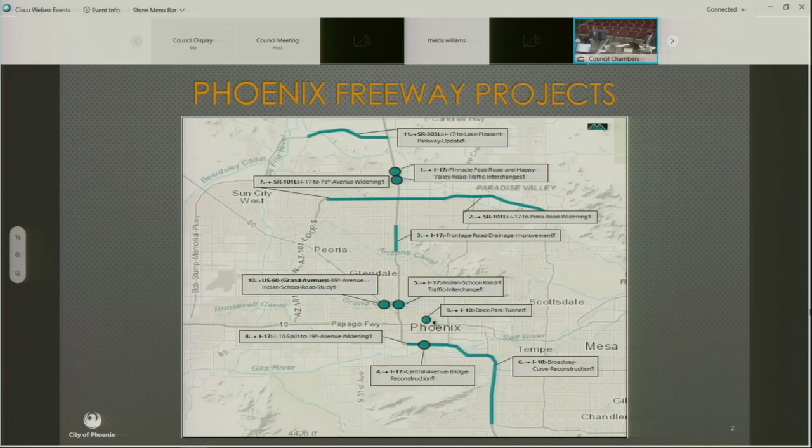The last one I wanted to point out briefly is number 9, in the center of your screen right above the word Phoenix. That's work taking place at the Hance Park tunnel repair. Anyone who's driven through the tunnel has perhaps had drips on their car, because there are 15 joints in the park. We've partnered with the City of Phoenix Parks Department as they were putting in the new playground, and we've put in a number of new joints to stop that leaking. We'll continue future joint repairs in partnership with the parks moving forward.

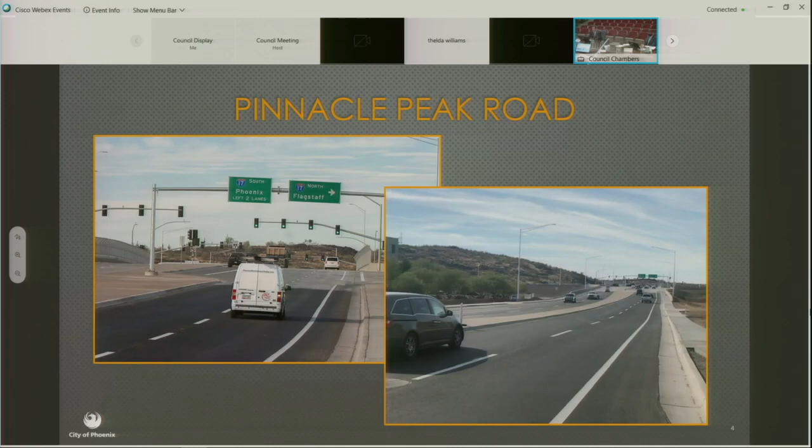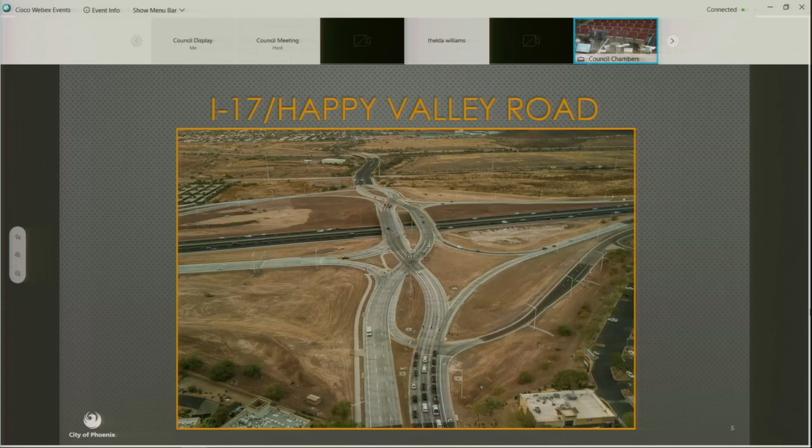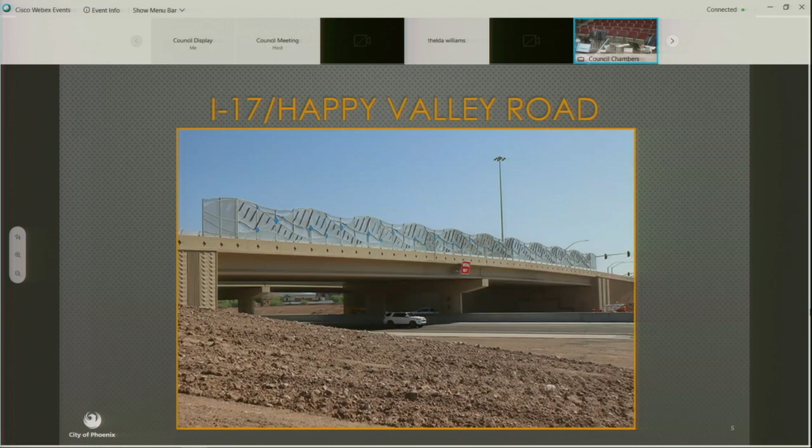The first project I want to talk about today, I'm excited to announce the new traffic interchanges at I-17, Pinnacle Peak, and Happy Valley Road are now open to traffic, which just happened this past month. At Pinnacle Peak Road, a new bridge was constructed with 2 lanes in each direction, with improved bicycle and pedestrian amenities. At Happy Valley Road, the roundabouts were removed and a new diverging diamond interchange was constructed, including 3 lanes in each direction, new bicycle and pedestrian access, and a new bridge art piece — the Office of Arts and Culture worked with artist Dan Mayer to design new artistic fencing along Happy Valley Road.

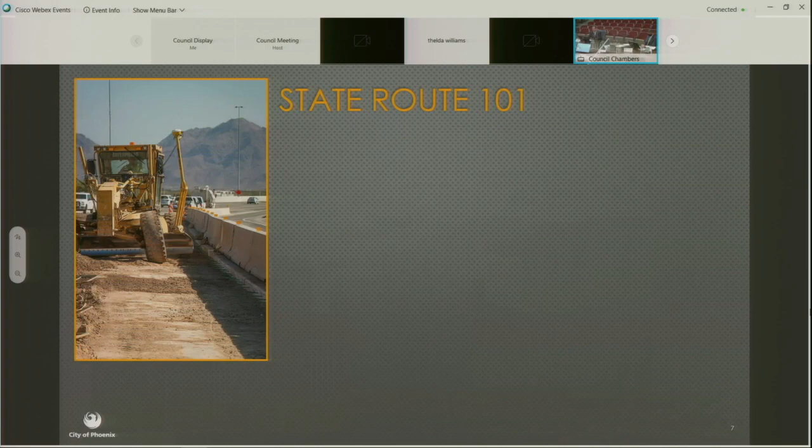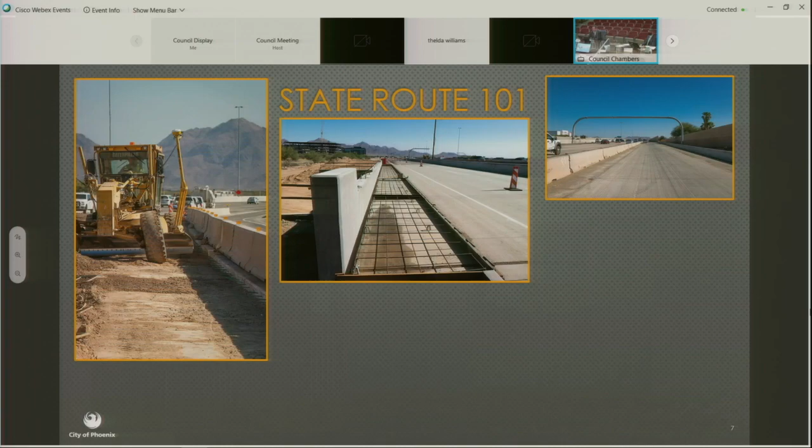The next project currently under construction is State Route 101. This widening project started in 2019 and includes adding 1 general purpose lane in each direction between I-17 and Pima Road. Additionally, an auxiliary lane in each direction is being constructed between 7th Street and Cave Creek Road, along with improvements to ramps and frontage road connections. It's been quite disruptive, but with lower traffic during the pandemic, work has proceeded quickly, and we're seeing completion of some sections, new sound walls along the corridor where warranted, and some new quiet pavement going in. This project is still on schedule for completion in mid-2021.

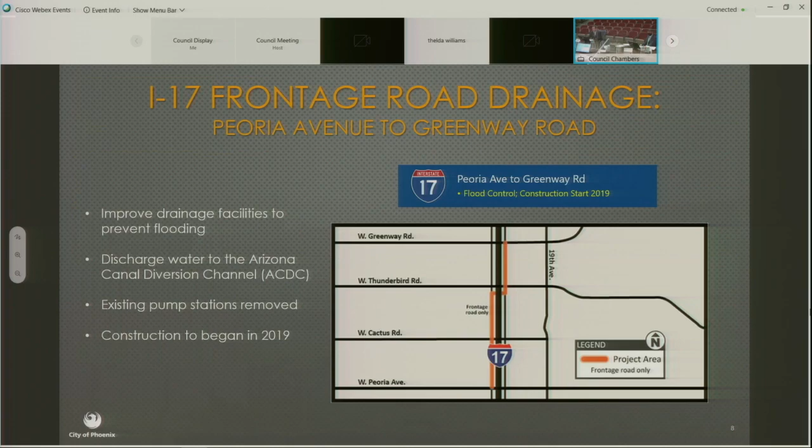The next project is one you received a presentation on at a policy briefing last year from ADOT — the new changes to drainage along I-17 between Peoria Avenue and Greenway Road. Construction started in January of 2019. Work at Peoria Avenue is almost complete, and now work is beginning at Cactus Road, so you might see closures along the frontage road there.

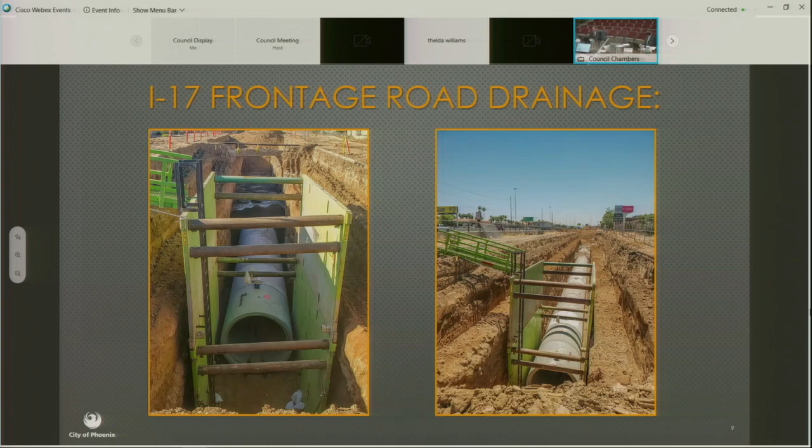This construction is replacing all of the old pump stations and putting in a new 90-inch pipe to drain water into the Arizona Canal diversion channel. The project is halfway complete, so we hope to see this done in the next year.

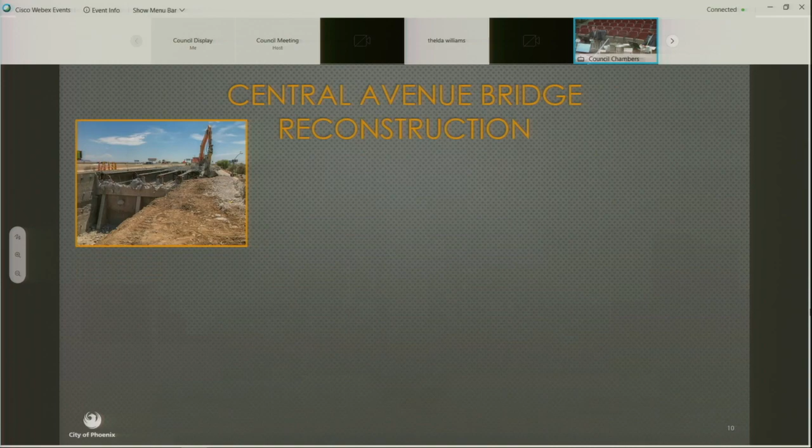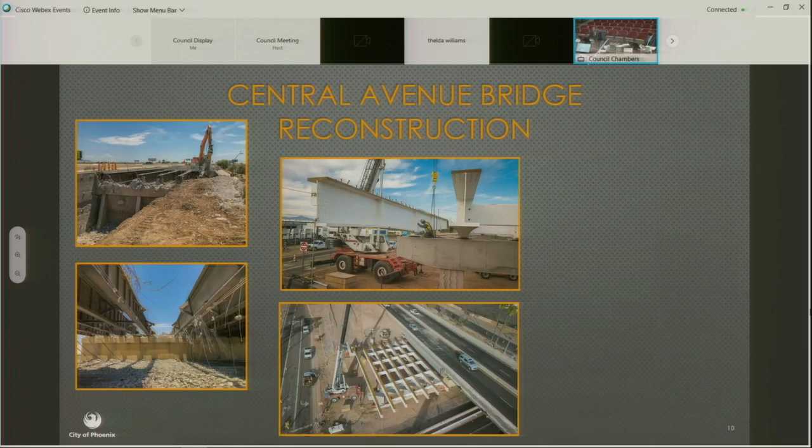Another project that's received a lot of attention is the construction of a new bridge at I-17 and Central Avenue. This entire section of I-17, going east to west, will be widened in future years, and that's the project I mentioned earlier that's under study. The bridge, though, is the first item to get replaced. The bridge at Central Avenue was over 50 years old. It needs to be changed out to accommodate the new light rail system going underneath it, and it also needs to be widened for the future widening of the corridor.

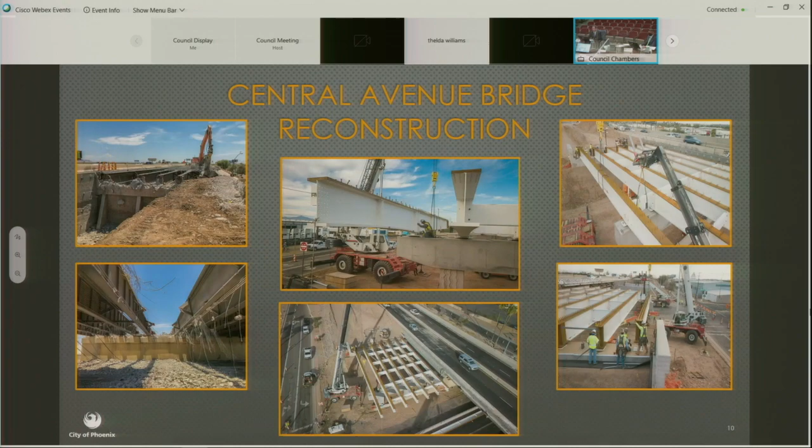The south side has been taken down, so as you look at the pictures on your screen from left to right, it shows the south side of the bridge being torn down and the new, widened bridge going up. The south side will open in a couple months, and then the north side will receive the same treatment of being torn down and rebuilt. Completion of this project is expected in fall of 2021. I should note again that ADOT and the city are working closely with Valley Metro Rail to coordinate any closures on this project as the new South Central Light Rail system is going in as well.

The next project to provide an update on is the Indian School Road and I-17 traffic interchange. In February of 2020, the City Council Policy Committee received an update from ADOT on this project. Since that time, ADOT has completed the environmental study and design concept report for this project to move traffic east to west in a better fashion. ADOT is at 30% design, but they've put a temporary hold on this project at this time. The City of Phoenix, working with the Maricopa Association of Governments, is conducting a bottleneck study along Indian School Road, looking at it as a corridor and not just as this traffic interchange.

We want to make sure we're inclusive of making sure the entire facility works and that we don't have bottlenecks when traffic comes up and over the freeway and gets to 27th Avenue. As you know, at 27th Avenue we have a number of pedestrians, cyclists, transit users, and neighborhood users. So we want to make sure, working with the Street Transportation Department, that we're looking at all elements in this area. As that additional look takes place, we've requested that ADOT come back and provide additional community meetings to talk about the project. But because we're doing a deeper dive, construction isn't expected to start until 2022.

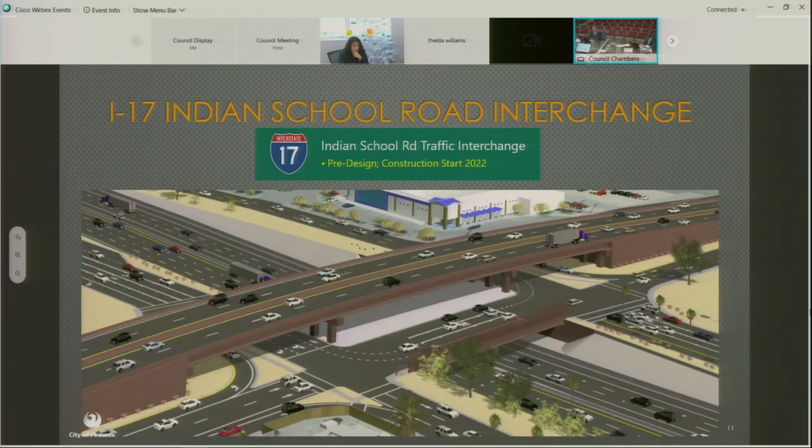Could we also, in the bottleneck study, look at—because it's an interchange and it's moving traffic—can we also look at the possibility of a BRT moving through there? Madam Chair, Councilwoman Pastor, I will work with Mario and the transit team to look at that option and bring it back to you. Thank you. Good idea.

Madam Chair, the next item in front of you is the Broadway curve reconstruction, a big project. It'll be the largest freeway reconstruction project in the region, if not the state, and it goes from the I-10, I-17 split all the way south past Ray Road. As you may recall from previous presentations, traffic volumes within this 11-mile corridor exceed 250,000 vehicles per day and include those vital connections to I-17, State Route 143 into the airport, US 60, and Loop 202.

Just as a refresher of the map in front of you, proposed improvements include 2 HOV lanes, 6 general purpose lanes, and auxiliary lanes in the gold section; 1 HOV lane, 4 general purpose lanes, and auxiliary lanes in the purple section; and new collector-distributor roads in the orange section. Additionally, there will be improved connections to US 60 and State Route 143. ADOT is in final negotiations with the preferred proposer, a consortium of companies—Pulice, FNF, and Flatiron. A contract is expected to be executed later this month.

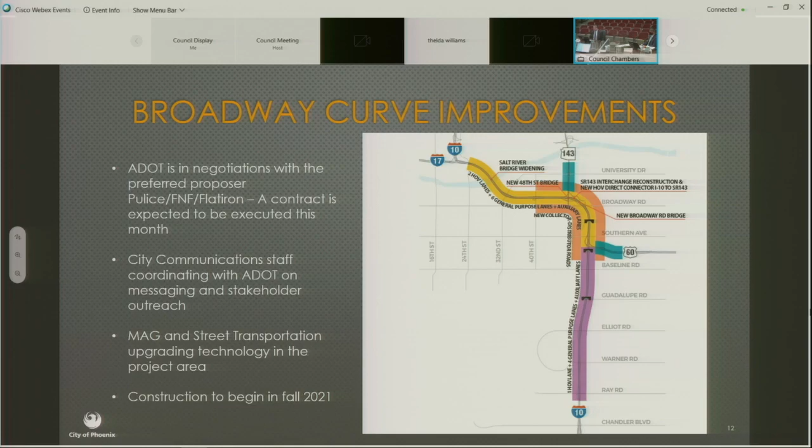Additionally, we wanted to let you know that city communications staff has been coordinating with ADOT on the messaging and stakeholder outreach, so that when this project starts we're able to reach out to all of the communities that will be impacted, from commuters, airport users, and neighbors, to make sure that traffic is flowing smooth and that there are ways to address it.

With that in mind, the Maricopa Association of Governments and the Street Transportation Department are working together. MAG is looking to provide additional funding to the city of Phoenix to make improvements to some of our arterials off this freeway network. There will be improvements to the signals, to the preemption devices, to fiber along there, so that when construction is underway we can monitor where traffic is going, and if we need to change some of the timing, that would be available to us.

Construction on this project is still scheduled to begin in the fall of 2021, so it is right around the corner.

A new project to bring before you—I think we haven't talked about this before, though it might have been in your monthly reports—there's a new study taking place through the Maricopa Association of Governments and ADOT, looking at the interchange of US 60, which is Grand Avenue, 35th Avenue, and Indian School Road. This design concept report proposes improvements that need to be made to this corridor along the arterial street networks, any sort of multimodal connectivity, and looking at how they all intersect with the BNSF railway.

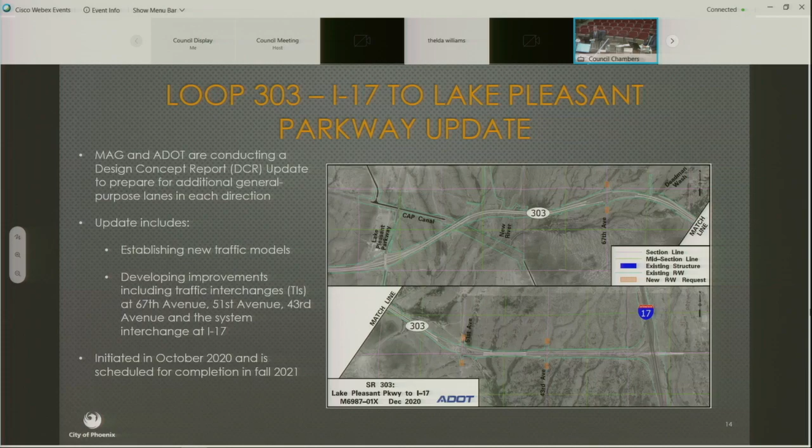With that, Madam Chair and members of the subcommittee, I'm available for any questions on any of the projects we brought forward. Anyone have questions?

Mayor, I just wanted to say this was a very good presentation. Yeah, go ahead, I wanted to say the same thing. I really appreciate the update. There's a lot going on with our freeway system, and as I always say, I'm really excited to see those drainage problems going away along I-17. So thank you. Yes, very good presentation, thank you, Tom. Thank you.

We will now go to the next item, 13. Pedestrian and bicycle safety.

Madam Chair, item 13, Kini Knudson, Street Transportation Director, and Assistant Street Transportation Director Briiana Velez, are here to discuss the pedestrian and bicycle safety programs, and I'll turn it over to Kini for the presentation.

Thank you, Mario. Madam Chair, members of the subcommittee, we're happy to be here this morning to present to you and talk a little bit about our bicycle and our pedestrian and bike safety programs.

This item was originally scheduled to come last month, but we wanted to have time dedicated to this issue. At the request of the subcommittee back in November, there was a request to provide additional information about our pedestrian safety improvements and our plans for that, and how we were coordinating those across pedestrian safety and bicycle safety efforts. This presentation is meant to provide that information.

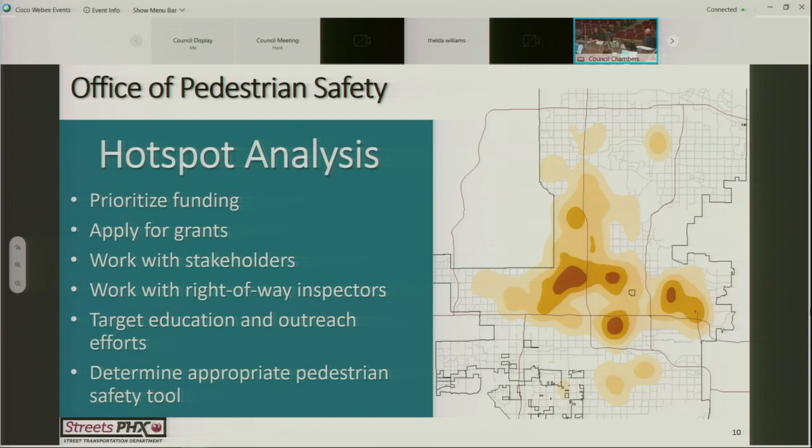As I just mentioned about using the data to apply for available grant funding, we are very excited to announce that the U.S. Department of Transportation awarded Phoenix nearly $17.5 million through the Better Utilizing Investments to Leverage Development, also known as BUILD grant. The grant will be used to make a series of safety improvements on the busy 35th Avenue corridor. The project consists of improvements that advance safety, mobility, and economic development in the project area.

This 3-mile portion of 35th Avenue between I-10 and Camelback Road is a pedestrian safety hotspot, where a higher number of pedestrian-related collisions and injuries have occurred in recent years. This corridor has diverse land uses and includes multifamily residential, commercial, and industrial developments, along with multiple K-12 schools, 2 community parks, and the campus of Grand Canyon University. The 35th Avenue corridor is one of the highest ridership areas for bus routes in Phoenix, with an average of 5,200 daily riders.

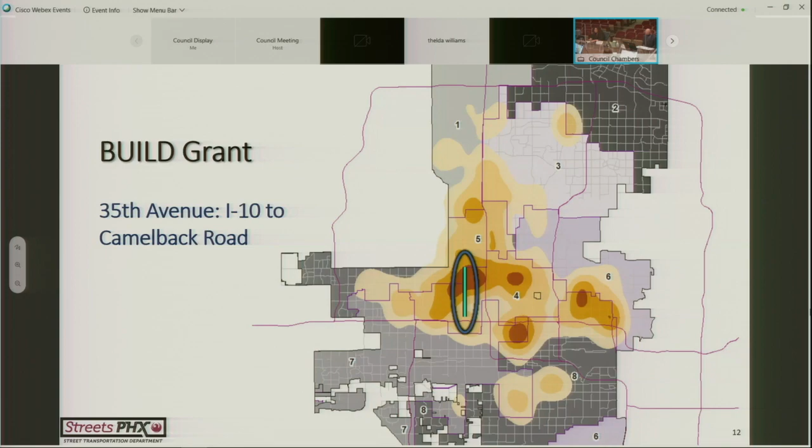Improvements planned for this project include installing 3 new HAWKs at mid-block crossings, installing LED street lighting along the west side of 35th Avenue, completing double-sided lighting throughout the corridor, and improving safety for drivers and pedestrians, installing raised medians at various locations to provide greater vehicle separation and a safe refuge for pedestrians, rebuilding 9 signalized intersections to modern standards that allow for support of new traffic technologies and safer operations, milling and overlaying the pavement to provide a smooth driving surface, and installation of broadband fiber optic cable to allow for the future integration of innovative technologies.

While most of the improvements I will be discussing in the upcoming slides are spot improvements, some locations such as this will need to be addressed as a larger capital improvement project to make safety improvements along an entire corridor.

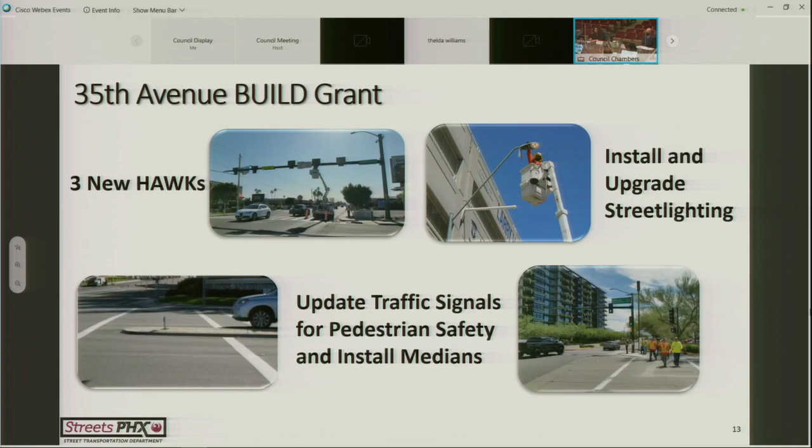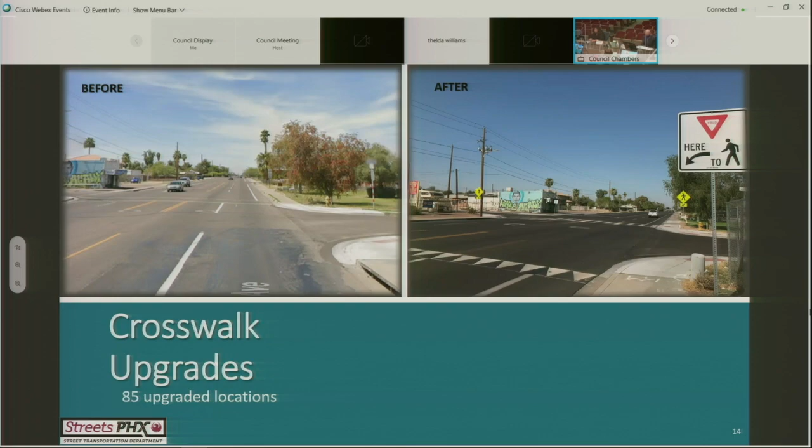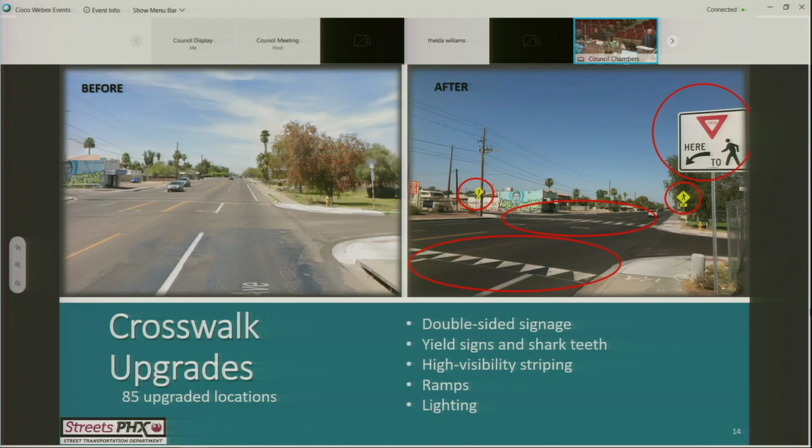Some of the spot improvements that were made in fiscal year 20 using the Office of Pedestrian Safety funding were crosswalk upgrades. To improve driver visibility of existing crosswalks on arterial streets, many crosswalks were upgraded to high visibility crosswalks, which include ladder style crosswalks, yield line markings, and additional signs. Some locations included additional streetlights and ADA ramp upgrades.

85 crosswalk locations on arterial streets citywide were upgraded to high visibility crosswalks. So every non-signalized mid-block crosswalk on an arterial street within City of Phoenix is now a high visibility crosswalk. We believe we've captured all of them, but if we identify any that were missed on arterial streets, then a work order will be immediately generated to upgrade the crossing.

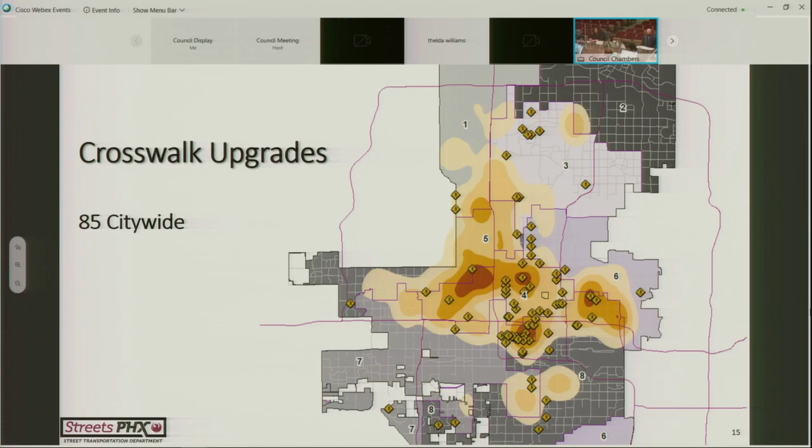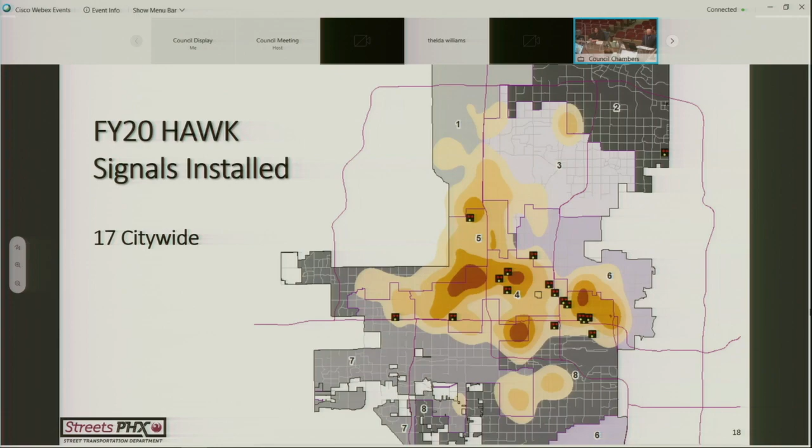To create a more seamless design and construction process for hawk signal projects installed with pedestrian safety funding, new hawk signals will be designed in one fiscal year and constructed the following fiscal year. In fiscal year 20, we were able to complete one new signal at 57th Drive and McDowell Road, adjacent to an elementary school. We are also completing designs on 8 new hawks and 1 new signal that will be installed this fiscal year. We have also dedicated funding this fiscal year for design of 6 new hawks at locations to be determined.

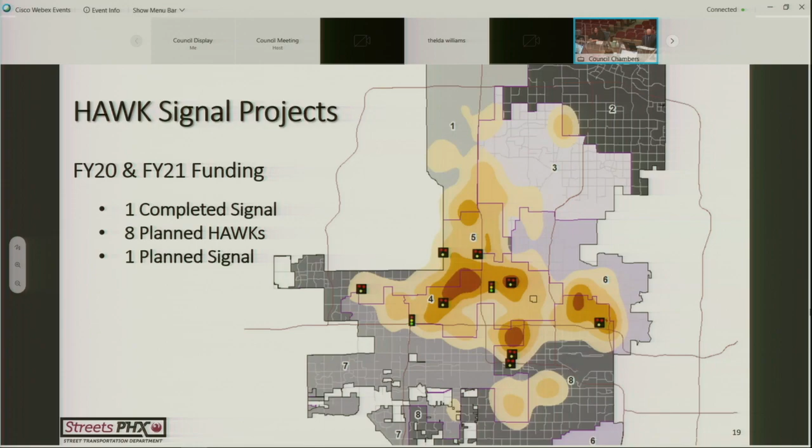As mentioned early on in the presentation, many pedestrian collisions occur in the dark hours, so having double-sided lighting on our arterial streets is important. You will find single-sided lighting on some arterial streets in the older parts of the city, and that is because at one point the standard on arterials was to have lighting on only one side of the street. The current standard, which has been in place for several decades, requires lighting on both sides of the streets for arterials. 2 areas were identified that had single-sided lighting and a high number of serious fatal pedestrian collisions during dark hours.

In fiscal year 20, 27th Avenue from Bethany Home Road to Maryland Avenue was designed and construction is planned this fiscal year. Thomas Road, 32nd Street to 36th Street is currently being designed and is planned for construction next fiscal year.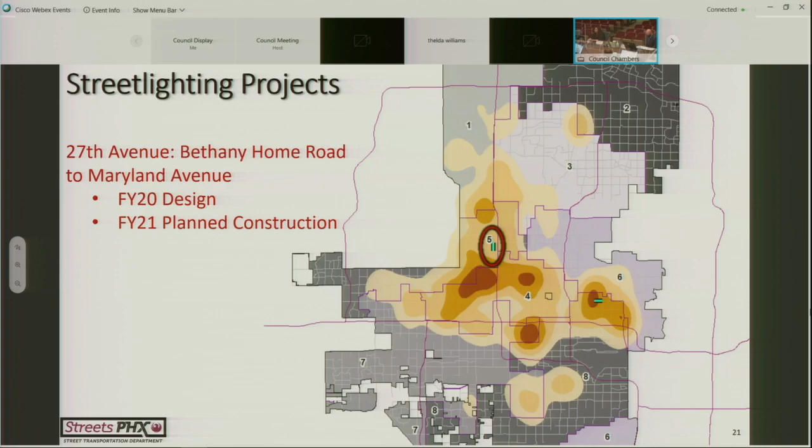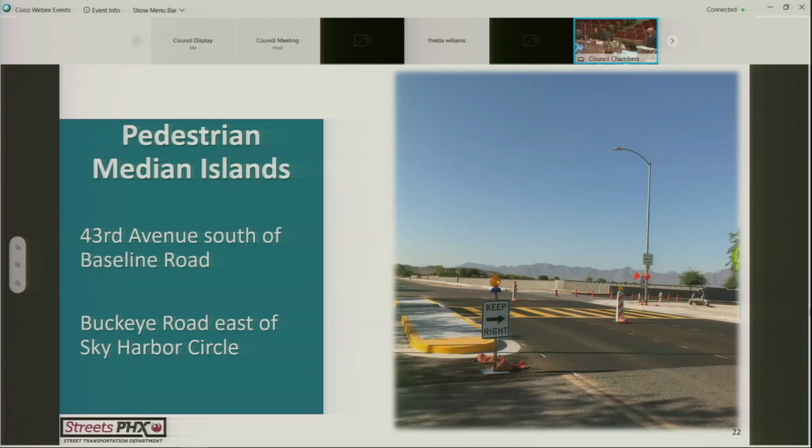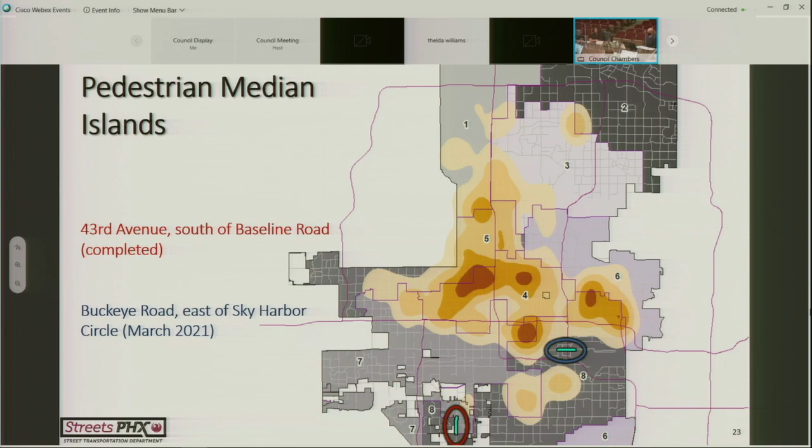Another safety enhancement are pedestrian median islands, which provide an area of refuge for pedestrians. Fiscal year 20 funding was used to design two median islands, one at 43rd Avenue south of Baseline Road and one at Buckeye Road east of Sky Harbor. The 43rd Avenue and Baseline pedestrian median island, which is adjacent to an elementary school, has been completed.

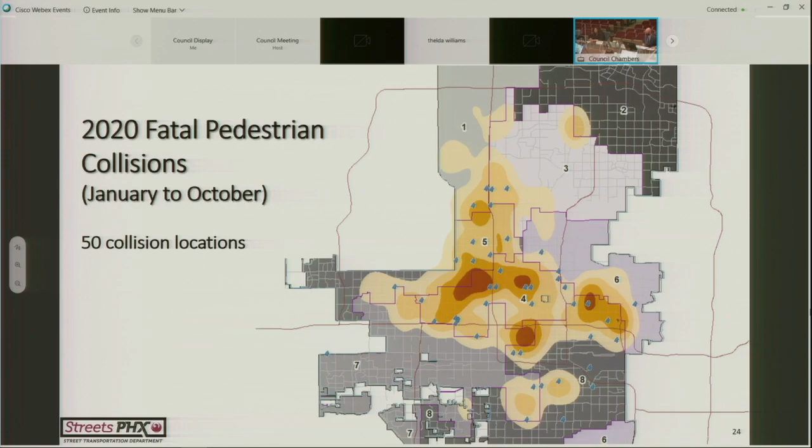In looking at pedestrian fatalities for the first 10 months of 2020, there have been 50 fatal pedestrian collision locations. Shown on the heat map are the 50 locations in blue, and you will see that almost every council district has been impacted, with the majority occurring in the central core of Phoenix and within hotspot areas.

This hotspot map includes both the 50 pedestrian fatality collision locations and the fiscal year 20 HAWK locations that were installed. The fiscal year 20 HAWKs were installed in hotspot areas throughout the city, with many installed near or at locations where a 2020 pedestrian fatality occurred.

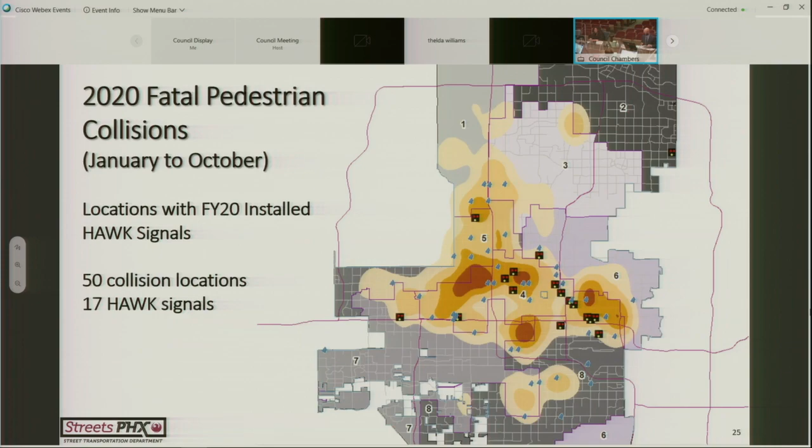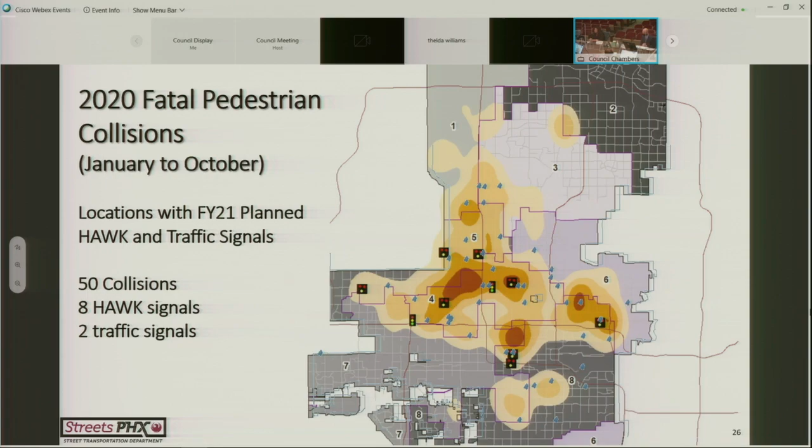Similarly, the hotspot map includes both the 50 pedestrian fatality collision locations and the planned fiscal year 21 HAWK and signal locations. The fiscal year 21 HAWKs and signals will be installed in hotspot areas throughout the city, with many installations near or at locations where a 2020 pedestrian fatality occurred.

Pedestrian safety is definitely a priority for the city, but when we look at roadway safety, all users of the roadway need to be considered, including bicyclists. When it comes to bicycle safety improvements, the Accelerated Pavement Maintenance Program is our greatest opportunity to make striping improvements.

Prior to the planned pavement maintenance on a particular street, staff will evaluate the existing striping configuration to determine if lanes can be narrowed to add in bike lanes, add in buffers to existing bike lanes, or narrow lanes to add an edge stripe. If lane removal is needed to add bike lanes or buffers, or bike protection is considered, then a public engagement process is required. Then the final striping design is completed.

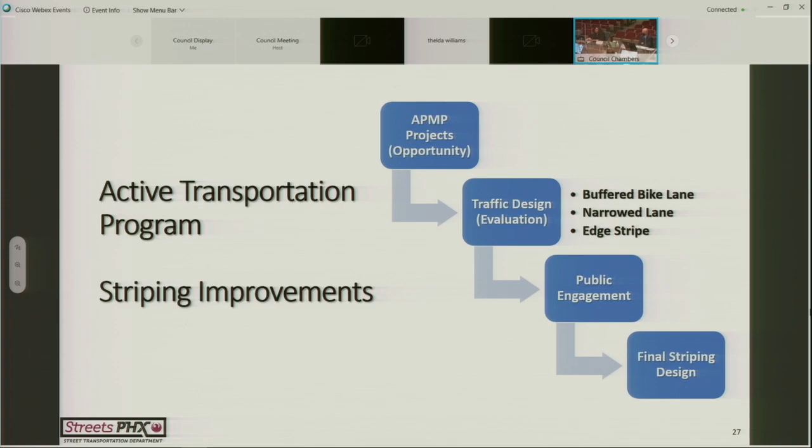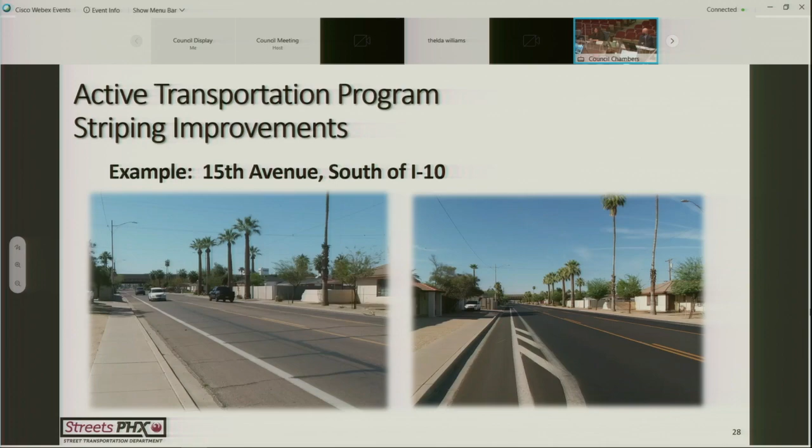In fiscal year 20, over 40 miles of new bike lanes were completed throughout the city, and buffers were added to almost 29 miles of existing bike lanes. In the first two months of fiscal year 21, close to 8 miles of new bike lanes have been completed, and buffers were added to 4 miles of existing bike lanes.

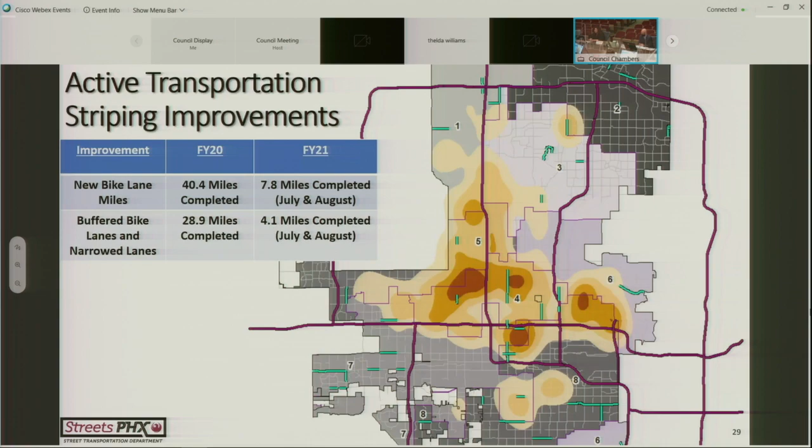Similar to what has been done in other cities to support social distancing and pedestrian bicycle safety during the COVID-19 pandemic, Street Transportation is launching a pilot program called Shared Streets for Social Distancing. Shared Streets is intended to support outdoor exercise for people of all ages and abilities and promote social distancing on low-speed neighborhood streets. 8 to 10 streets for local traffic-only restrictions will be selected through the application process for the pilot program.

It is a voluntary program, and residents nominate their street. The program will encourage local residents to get out and walk, run, bicycle, and scoot on their local street, while limiting it to local traffic only and encouraging drivers to drive slowly and cautiously.

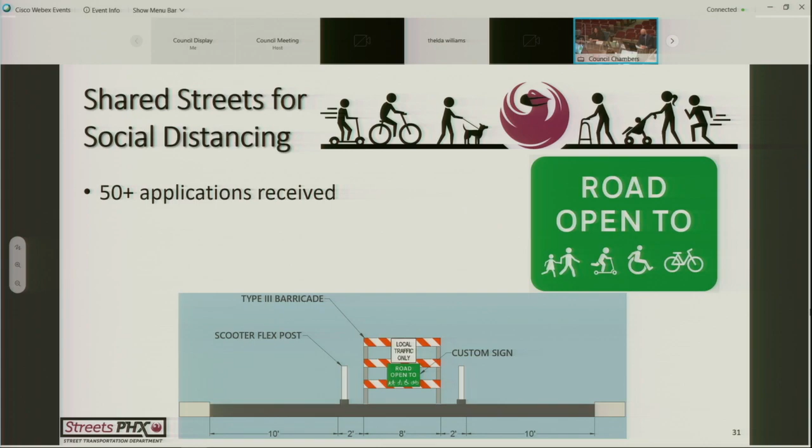The program is only available for local or minor collector streets that are at least a minimum of a half a mile. The application process opened in early December, and we have received more than 50 applications. They are currently under review with a focus on prioritizing locations based on criteria such as high population density areas with a greater need for recreational space, areas more than a half a mile from a park, trails, or open space, and locations with a higher percentage of households without cars.

Here's a picture of the local traffic-only barricade that will be set up at the selected locations during the pilot program. The pilot program and installation will begin in February 2021, and the program will run through May of 2021.

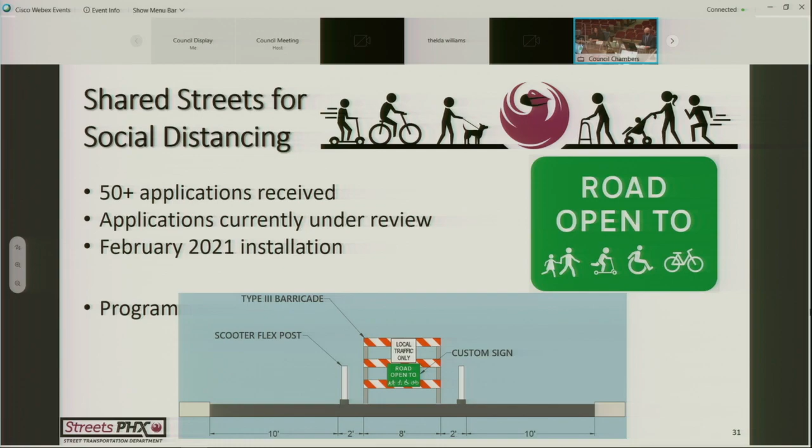And that concludes our formal presentation, and Keenan and I would be happy to answer any questions.

Chairwoman. Yes, go ahead. Thank you so much for that, Brianna and Kini. That was a great presentation.

I just have a few questions on this. I know you said in your presentation that there's going to be more HAWK lights installed, is that true? To be determined, correct. So with this year's fiscal year 21, we are looking at identifying 6 additional locations that we will design this year, and then construction will take place in fiscal year 22.

And how are you making those decisions on where they're going? Madam Chair, Vice Mayor Guardado, we are utilizing the hotspot map and the data that we receive on the VRUs to make a determination on the highest priority areas.

Okay, because I would like to be able to see that. Just from the heat map, it was great to see it between Councilwoman Pastor and I. I think we have a lot of those issues. So it would be good if you guys could, before those decisions get made, take us into consideration as you're making them.

This procedure does not pertain to the official renaming of streets, which is managed through planning and development. There are 2 types of ceremonial signs: ceremonial street name signs, typically installed at major intersections and mounted on traffic signal poles just below the illuminated street name sign. These signs are 24 inches by 90 inches in size.

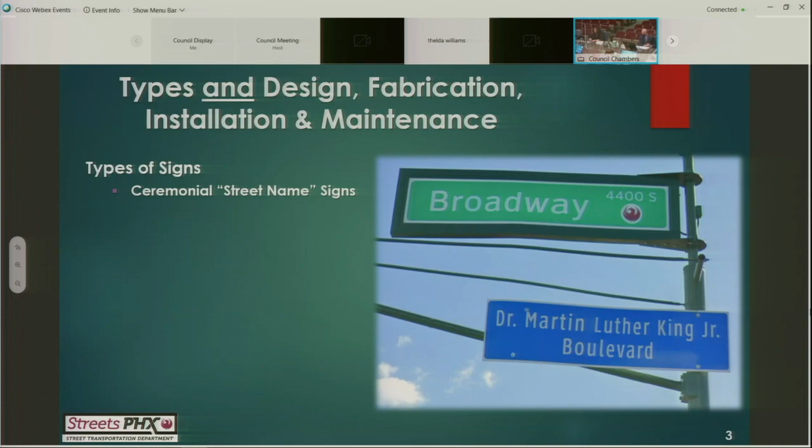This is similar to the Dr. Martin Luther King Jr. Boulevard sign located along Broadway Road. The other type is a ceremonial sign topper, typically located on local intersections and flag-mounted to an existing signpost. These signs are 8 inches by 30 inches in size.

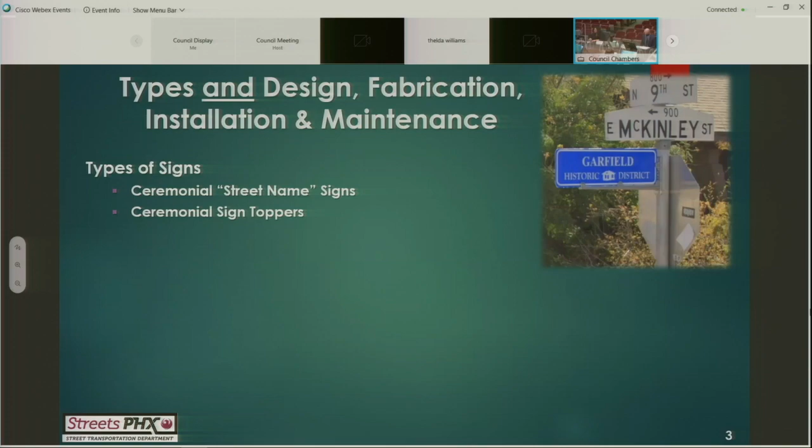The first ceremonial sign topper will be installed this month, honoring Dr. Louisa Stark. All ceremonial signs are blue background with white lettering so as not to confuse drivers with official city street names. Illuminated street name signs are not allowed.

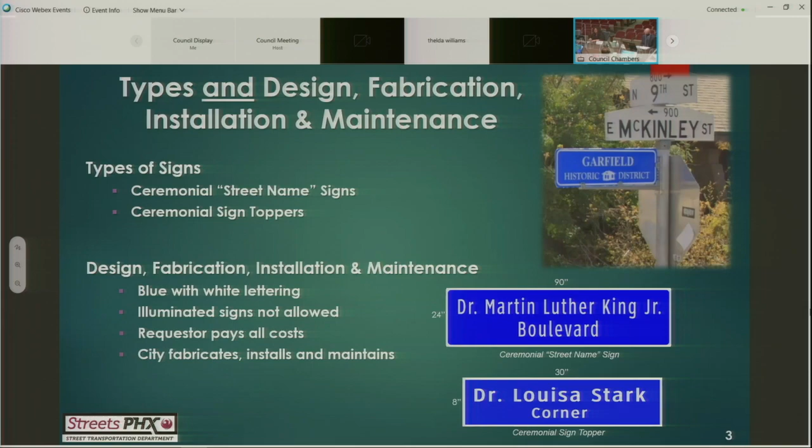The requester is responsible for all costs, including fabrication, installation, maintenance, and replacement of signs. The city will fabricate, install, and maintain the signs.

Ceremonial sign requests will need to be submitted through their respective council district office. If the council district is supportive of the request, they will be referred to streets to process it. The requester will be provided with the application and will need to provide the honoree's qualifications and identify the proposed location and sign type, and sign a letter agreement to fund all of the cost.

All ceremonial sign requests must be approved by City Council. Street transportation will ensure the requester is notified when the request is scheduled for City Council action. That is the end of our short formal presentation. I'm happy to answer any questions.

Does anyone have any questions, comments? Just a quick question: first off, I appreciate that you put together a procedure, but do we need to take action, or is this just you highlighting your new process?

Madam Chair, Councilwoman Stark, yeah, just highlighting the procedure. Since it's a department procedure, it doesn't require council action or subcommittee action. We wanted to make sure the direction we're going with the procedure doesn't cause any concerns or issues for any council members we might want to take into account. But anything that comes out of these ceremonial name changes will still have council approval as part of the process, so there will be council action with individual requests.